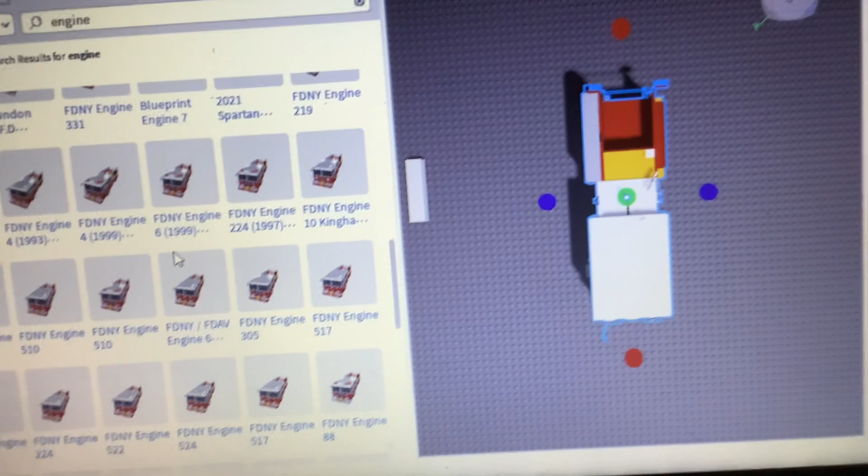So I actually scaled this part wrong. We're going to scale it to match this engine. And this is going to be the foundation of the truck. Sort of - this is actually going to be the bumper. What you want to do is insert an FDNY engine, like a 1993 model, so you guys don't mess up or anything. And you're going to scale it to this size. I'm not going to add the curve, because this is actually going to be a bit blocky. Part 1 is going to be like the front end of it.

Now I have a lot of time on Studio, so I guess I'll do this tutorial. And here's the front end. So now you can delete this, because we don't need it anymore. And now we're going to move this up, like so - you're going to raise it up like this. I'm going to leave it off the ground so that way it doesn't break.

Now, you're going to grab this part and you're going to duplicate it. You're going to do this numerous times in this video. Then you're going to scale it again. And now you're actually going to do some other things - now this is different. Now you gotta paint it red. Make it a brighter red, brighter shade of red. Yeah, that's good.

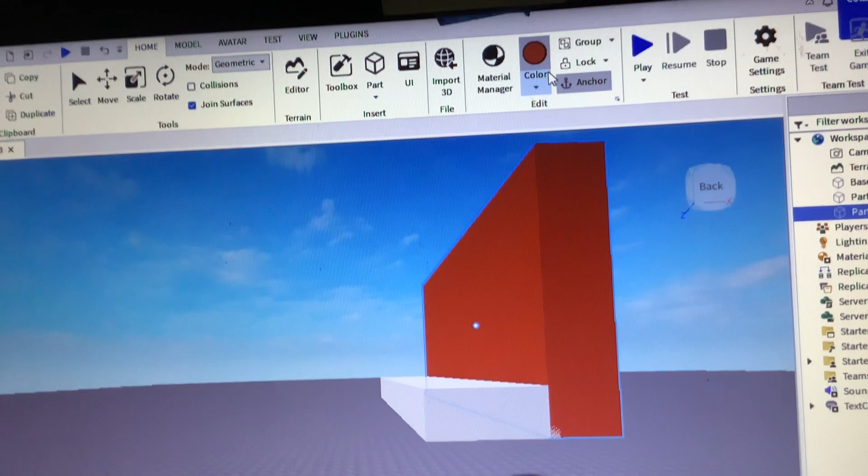So now we have a brighter shade of red. And if it's inside of the bumper, we're gonna move it out of the bumper. Yeah, this is my only attempt I'm gonna do making a fire truck on Roblox, my very own. And you're gonna scale it like this. There you go - now we have the front end part of the fire truck.

Now we are going to, if the bumper is too thick, we're gonna make it a little bit thinner.

Now, because this tutorial is going to be separated into parts, so you can save storage. I don't want to lose storage, because I am, on Friday, going to Station 13. And I'm also possibly going to be doing a collab with one of my friends. His name is Christian Hager. I'm going to possibly be meeting him, I don't know. It's still maybe, it's not a yes or no, but I might be meeting him. I don't know when, but he's coming down here to my hometown tomorrow. I don't know if he's coming to Seminole County tomorrow, but he's going to Orlando tomorrow.

Alright, now you're going to duplicate this part. And you're going to move it over here.

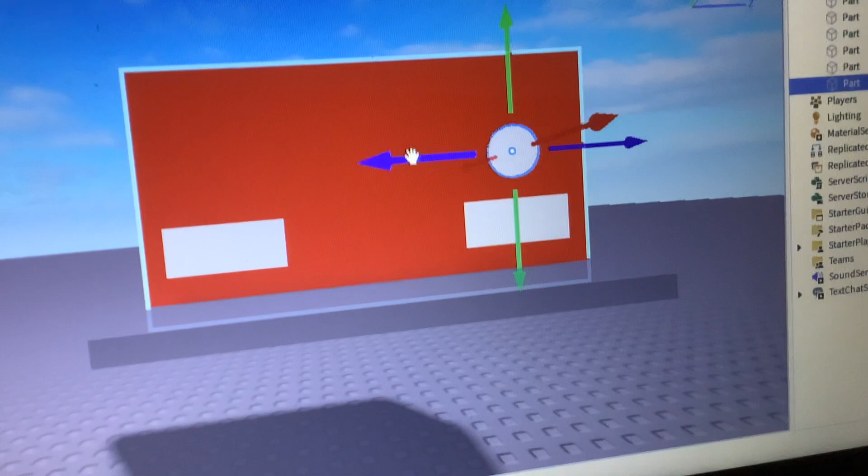So then you're going to grab the part we just put there and scale it to right there. And then you're going to duplicate it and put it like that.

Now here comes the part where you have to color. So I actually made this a little too tall. You're going to lower it like this. Oh, no, I didn't, it's okay. Forget it, let me just put it back to its original height. You're actually going to raise it for the turning signals.

Now it's a little bit of a tricky part, this is the trickiest part of them all. So you're going to duplicate it and scale it like this.

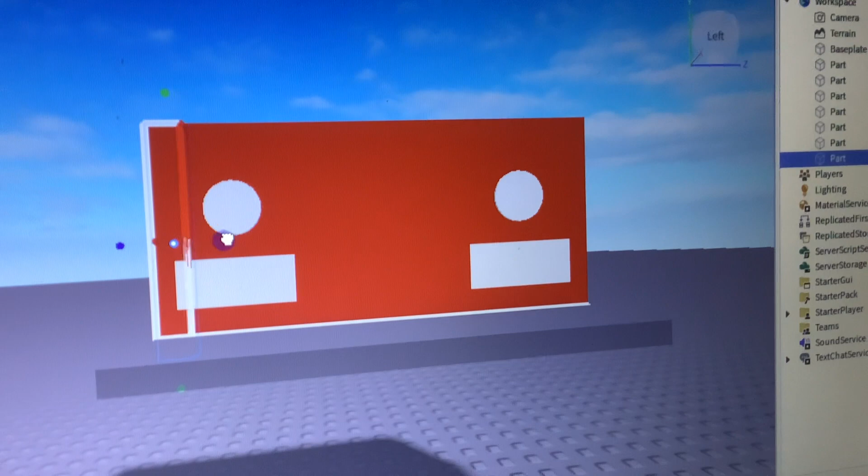Now, part 1 of this is only going to be like this part, the bottom part of the cab. Part 2 will be more of the top part, like the white roof.

So here we have the side of the truck. I know it doesn't look good, I'll try and improve it. Yeah, this literally does not look great, but I'm trying. Oh, excuse me, hold on.

We gotta color the lights first. Those are too dark of a red, let me see if I can make it a little bit brighter. Well, it's from 1993, so that's a good color for a truck.

Now don't make it too old, because if the truck looks too old, it's not going to be serviceable. But still, if you want to make a museum piece, you just make it look as old as possible, but restored. Okay, I'm just joking, don't do that for real.

Alright, and this part is actually going to be where the wheel goes. So this is the actual part where you've got to focus the most. Make sure you're putting it right, so you can't make it too big or else it's not going to look good. Very good.

And the detailing is going to be in another part. Now, I don't know how this series is going to go.

Alright, now you're going to grab the back part, duplicate it, scale it, and scale it again. You're going to scale it this way. And you're basically done with the shell. Sorta - this is just the beginning of the cab. We're not done yet.

So now, in case you guys want to save this, you're going to group them, and then it doesn't say it's anchored. So before we continue this tutorial, we're going to make sure it's anchored by testing it. After you group it, you must test it so you can make sure it's anchored. If it's not anchored, you have to press the anchor button so you can anchor it.

And then I'm going to show you guys how to add chassis to it eventually. So this part of the tutorial does not count. Yeah, this PC is older, it's made by Dell, so it's going to be a little bit slower. I hope I didn't press the keys that are important for this tutorial. So this part of the tutorial will be 25 minutes long.

Alright, now we gotta look for the... alright good, it's anchored, alright good, we continue working. Now it hasn't been 20 minutes, so we're going to do more stuff. We're gonna do it until the 20-minute mark.

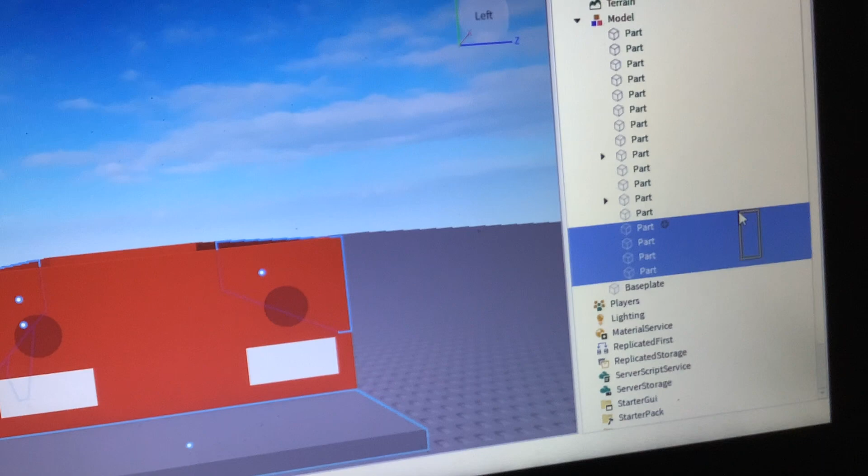Alright, here is the front end. Now we're going to duplicate it, scale it a little bit, and then scale it like this. And then grab this, name it white, and rescale it again.

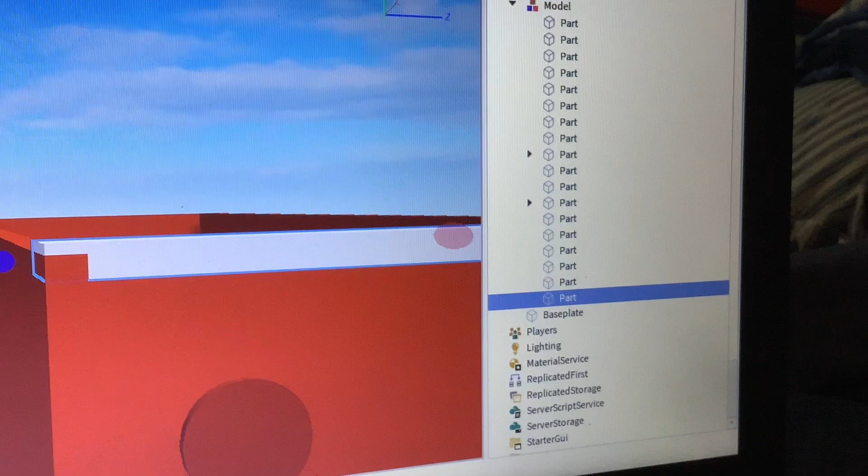And excuse me - yeah, I know it wasn't a big burp, but I just said excuse me anyway, because I have a habit of saying excuse me, even for the smallest things, because I'm trying to be polite.

And now we got the front end, but we're not done. We're far from done. We still have to make the rear, which we're going to be doing in a separate part, so we're actually going to make this a 25-minute video.

So we're going to look for the part we just put there, and I need to look for that part. It should be down here. Oh my goodness, I did not even check. So we're going to... oh my goodness. We're going to duplicate this, and then scale it across the other part.

Oh, and we're also still, there are some things we still got to get done. For example, the interior - so the last parts are going to be the interior designing and all this, not the scripting. I told you, there's not going to be any scripting.

And also, yeah, I forgot, oh, the detailing, like the outside. And also I might add a dash to this thing, but it depends. I'm still trying to figure out what I'm going to do, because the dash I'm going to add says it can go up to 160, and I want it to go only up to 80. So I'm probably going to do something to the dash. Who knows?

And paint it white. And now you have the cab of the truck. Sorta.

Now for that back part right there, you're going to scale it up. Like so. And we're almost done with the cab. Don't worry, this is going to be a 25-minute video, and it's just going to be the cab. I think we'll be able to do it.

Let me check. Does it have windows on both sides? Yes, it does.

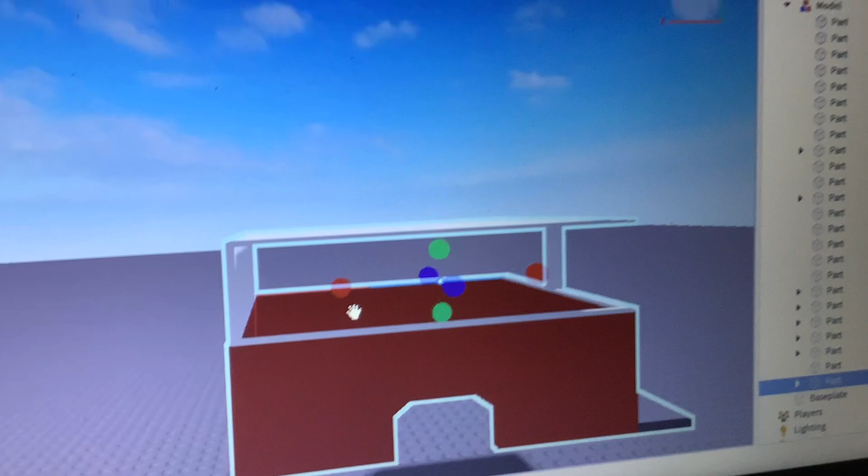So we're going to go ahead and do this right here, and we're actually gonna... no, I'm lying, we're gonna actually delete that. We're gonna use this part right here, this thing. That's one in the center.

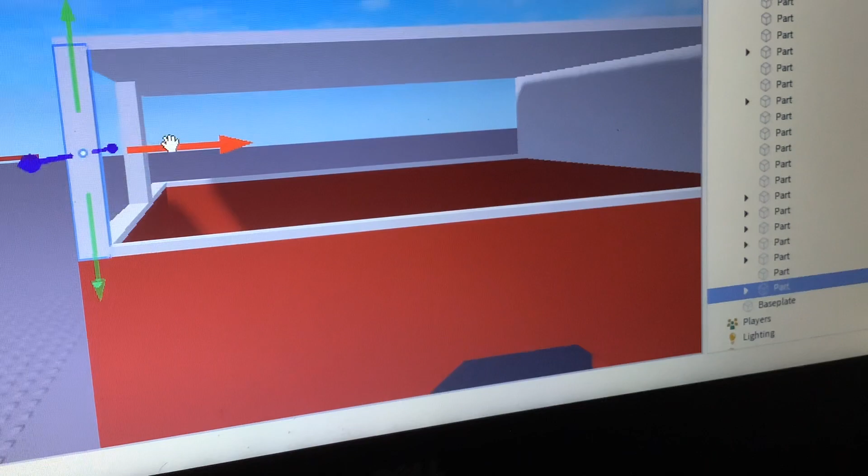I know it may sound confusing, but trust me, I am new to this. I don't usually make the trucks myself, but a lot of people have been telling me to make trucks, so my own trucks. So at first I just started making the bodies, now I'm making the truck itself, and I'm actually going to do a tutorial for it for you guys, because I know some of you guys don't know how to make trucks, and that's why you guys know me, because Johnny is going to try and provide you guys with the tutorial.

Alright, and now we got this. Now, we're going to duplicate it and put it right here. Now, for some reason, they have windows above this, but I like it. It just gives it the original design of the truck.

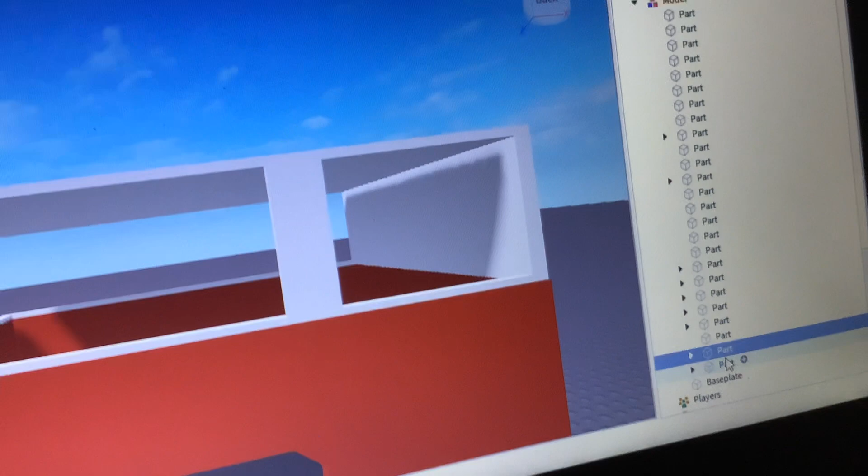And you're actually going to make it thicker, so that way it doesn't look so unrealistic. You're going to delete this one because it's too thick. And you're going to grab this one and just put it right here. Yeah, that's good. Yeah, it's actually not that bad.

Alright, I know it's a little boxy, but whatever. That's my first time doing this. We're almost done with the cab.

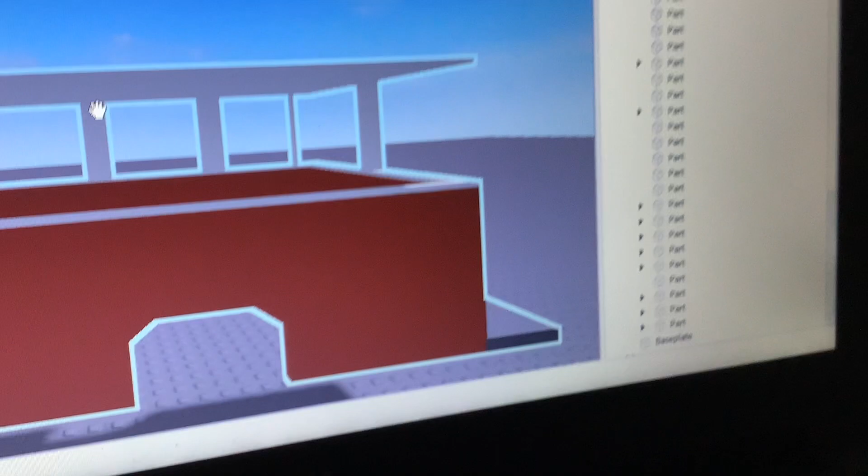So you're going to duplicate the part we just put there, and move it. And it's actually difficult to do this, because you got to put it precisely... Wait, okay, I'm glad I noticed this part.

You need to make it the same thickness. So I'm going to do that with the other parts here. You're going to make it the same thickness as the walls.

Don't make it too thick, because we're also going to have to learn how to turn off collisions for some parts of the truck.

And because this video seems like it's going to be 25 minutes long, maybe I'll make it 30 minutes long, so that way I can also add more of a rear part to it. I don't know, we'll see. We'll add, like, the rear to it. I like maybe. Not like the whole rear. Alright.

Oh boy, that I did not- I completely forgot about this one. You're going to bring it over here.

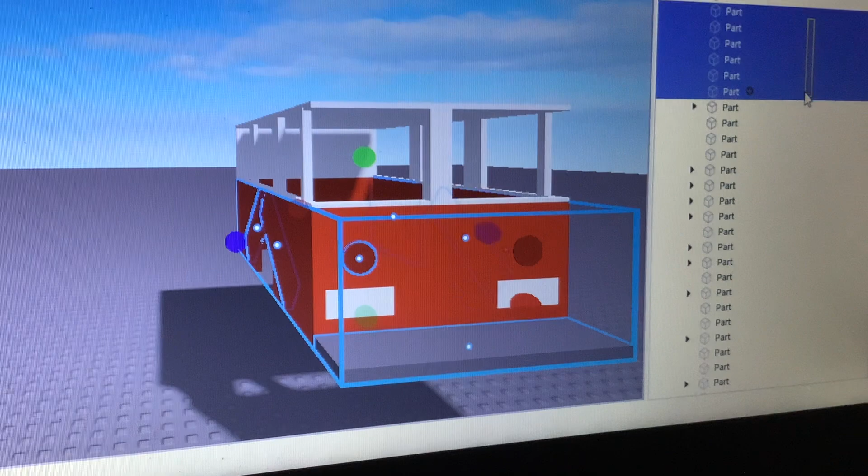Now I know you're thinking, Johnny, why are you doing that? Well, grab the model, you duplicated it, and let's see.

We're gonna delete the... and delete this stuff. Why are we deleting it from this model? I'll show you guys in a second. Because...

I'm trying to find the front headlights. Yeah, we need to delete them from this model. Alright, I now found the other headlight.

And you're going to delete that. And you're going to scale it to be a little bit smaller. Now you're going to paint it all black.

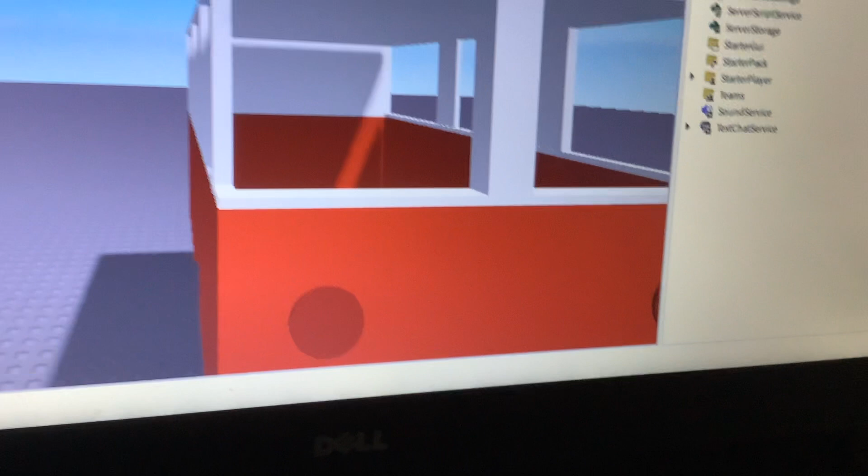Okay, I'm just kidding, I'm not going to do the interior yet, because I decided to try and do that just now, but it seems like it would be a little too hard. But here is your truck, or the cab of it.

Now, part 1, actually part 2 is going to be the pump. No, I'm going to do 30 minutes, hold on. Yeah, I said I'd do... yeah, so this was a 25-minute video actually. I was thinking of doing 30 minutes, but I want to save my storage.

So now you have the cab of your fire truck. And this is just part 1, part 2 will come soon. Maybe tomorrow? I don't know. We'll see. So, yeah, I'll see you guys in the next part of how to make a Seagrave, or 1993 Seagrave FDNY fire engine on Roblox Studio.

1993 Seagrave FDNY fire engine on Roblox Studio.